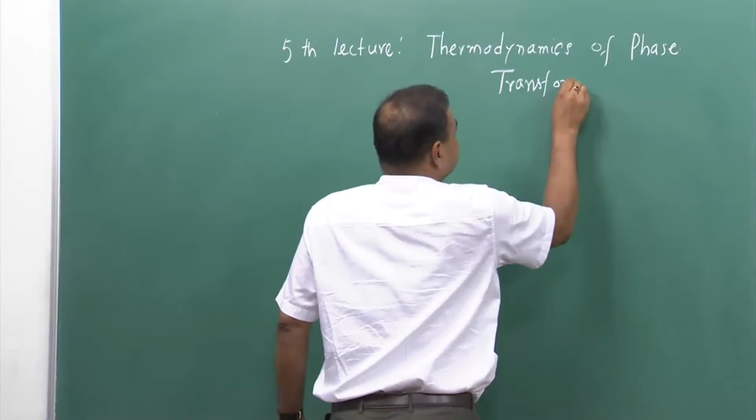It will be on thermodynamics of phase transformations. And mainly our interest would be to quantify a driving force for phase transformation. So, this entire lecture and in next couple of lectures also we would mainly concentrate on how we can calculate the

magnitude of driving force for phase transformations. And in the last lecture we started with finding enthalpy and entropy from the Cp value, because Cp is the measurable quantity which can give some sort of quantification of enthalpy variation as well as entropy variation. And once we know the enthalpy as well as entropy variation, we can easily find out what is going to be my free energy variation, and that free energy variation would allow us to know what could be the driving force for that particular phase transformation.

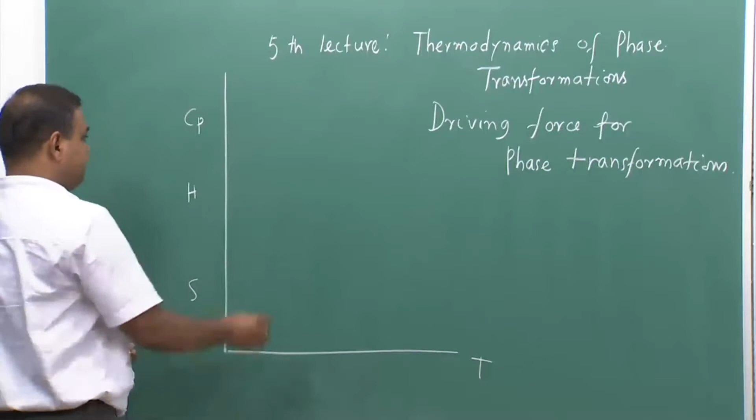Now, last class we started with the pictorial change of enthalpy as well as entropy as well as Cp as a function of temperature for a condensed system, and we have taken a single component system. That means, it is a pure substance. We have taken pure metal actually, and we have tried to see how Cp, enthalpy as well as entropy varies as a function of temperature.

So, we have seen that the Cp varies like this as a function of temperature. This is in Kelvin scale, and then enthalpy varies like this and entropy varies like this again.

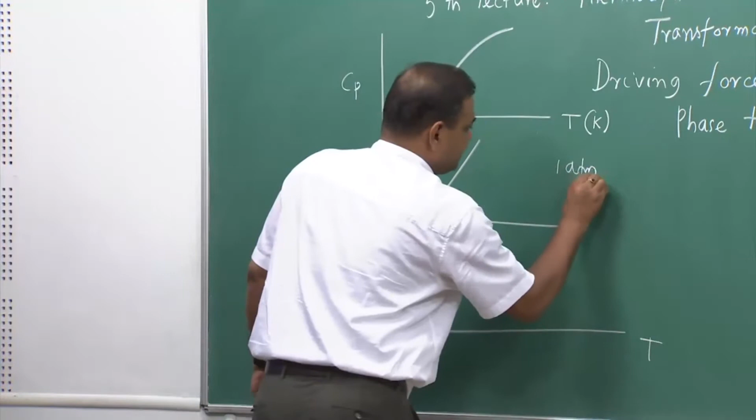Now, also we have seen that if the substance is in most stable condition, and in case of metal we see that the solid is the most stable condition, that time we find out, rather we impose some particular condition. With reference to that condition, we try to measure the change in those parameters. These functions enthalpy, entropy, we try to measure with reference to that particular value. And in case of solid metal, if the atmospheric pressure is 1 atmosphere, that time at 298 Kelvin, the value of enthalpy of that particular pure substance in solid state is 0.

So, now this is also in Kelvin. So, these value is 0, that means this is enthalpy of solid. This superscript S means it is a solid condition.

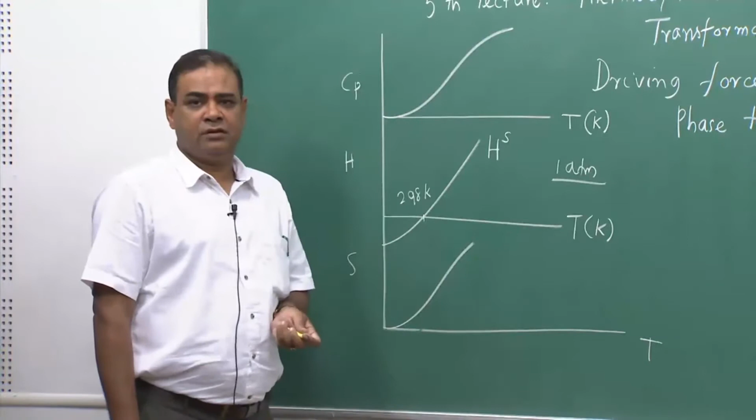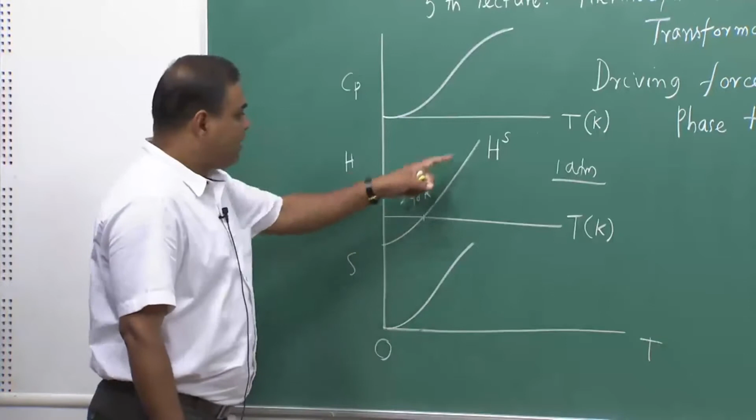Now, this entropy of a pure substance as per the third law of thermodynamics, we know that if it is absolutely pure, if there is no contribution of mixing entropy to that particular total entropy of that substance, then if it is a condensed state, at a constant pressure, this value at 0 Kelvin is 0. Now, once we have this information, so now if this is for solid, this also we can say that this is entropy of solid, and this is also Cp of solid.

Now, for solid phase we have found out these values. Now, accordingly, if we have a condition which is liquid, we can immediately find out what would be the entropy as well as enthalpy values, because in case of liquid also we have the information of Cp for the liquid. So, now in that case the Cp of liquid is higher than the solid Cp. So, if the Cp of liquid is higher than solid Cp, then the enthalpy of that liquid, of that pure substance would also be higher over the entire temperature range.

So, now I can draw the enthalpy of liquid as the yellow line, which tells me the enthalpy of liquid. Now, here interestingly, it is also going through a 0 value, but that 0 value doesn't cross the temperature axis at 298 Kelvin, because the standard state, which is 1 atmosphere pressure and 298 Kelvin, that time this enthalpy of solid is assumed to be 0. So, now then other than that particular temperature, for other phases the 0 would appear at different points, different temperatures. So, it is appearing at this temperature because the enthalpy of liquid is higher than the enthalpy of solid.

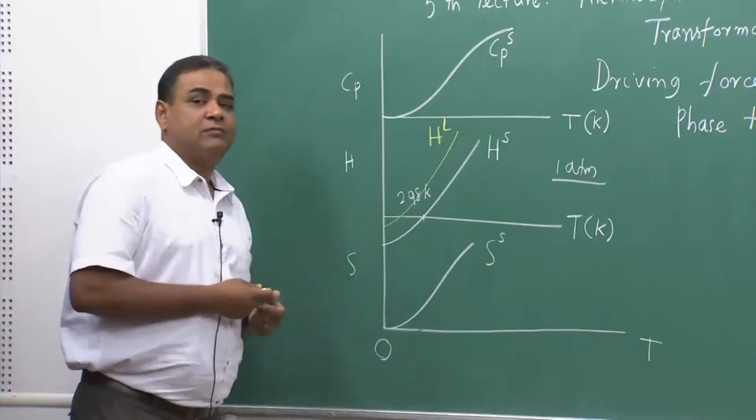Now, entropy of liquid also would be higher than the entropy of solid, because the Cp of liquid is higher than the Cp of solid.

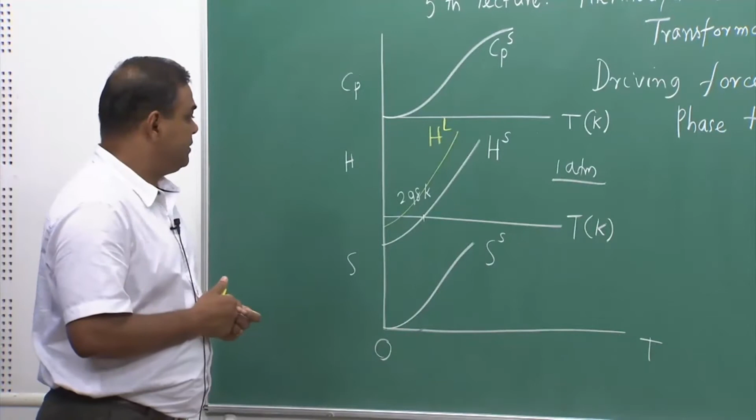Now, our primary interest is to find out G. Now, G can be related to which is enthalpy minus Ts. This is the relation. Now, if I find out the enthalpy of solid as well as liquid separately, and at the same time if I find out what could be the entropy of solid and liquid separately from the Cp data, I can get these two values.

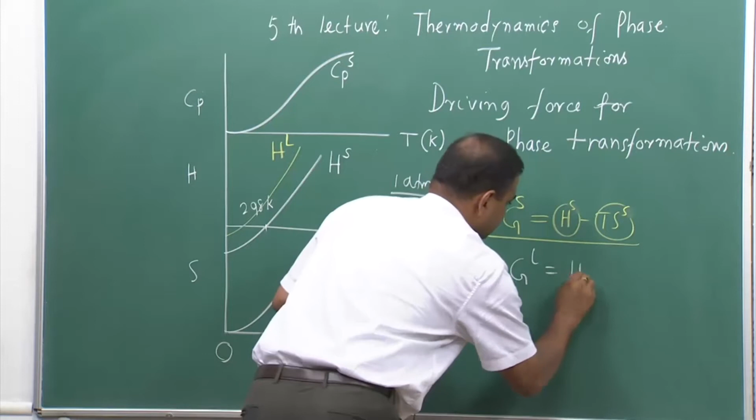For solid I can get solid, and for liquid I can get liquid.

Now, once we have this information, we can also accommodate this TS term along this line with a negative sign. We can accommodate that. Now, at each temperature, I would be able to find out what is my TS term, because temperature I know, and S I have calculated from Cp data.

Now, that TS term, if we subtract from H value, then I will get a point at each temperature. Let us say at this temperature, T1, I try to find out what is my TS solid, which is T1 S solid. So, then that particular thing let us plot it here. So, this is that locus, and this is that point.

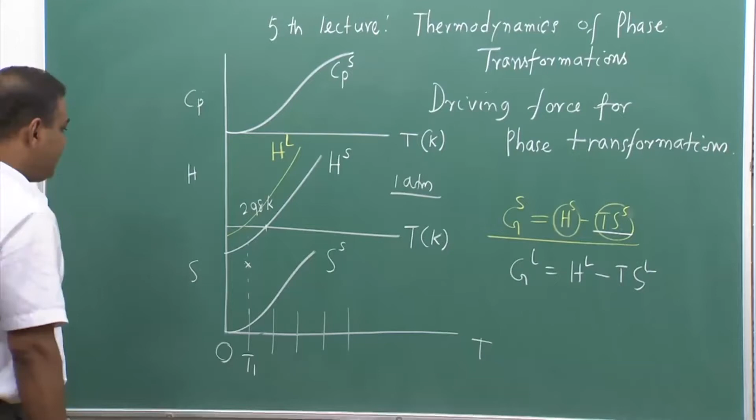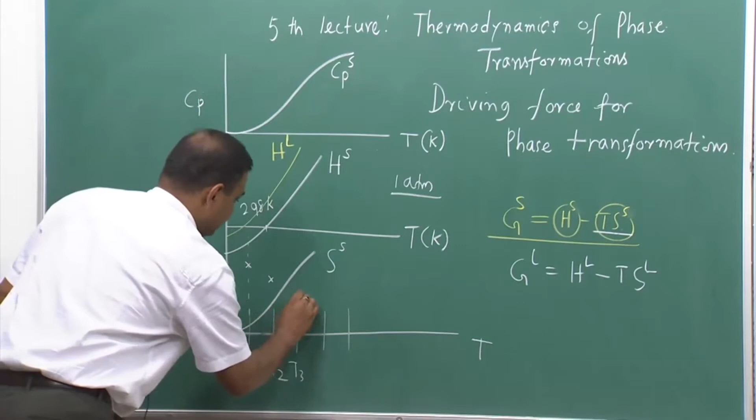Similarly, at a little higher temperature, T2, I can also get another point. Then T3 I can get another point. So, like that I will get information where this particular value is nothing but T1 S1 S, and this particular value is T2 S2 S. So gradually it would go like this.

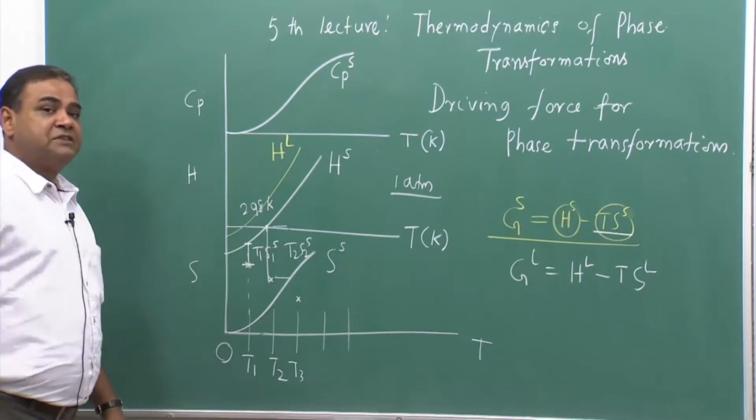Then if I connect those locus points, because those locus points are telling me the G of that particular solid at different temperatures, now if I connect them, this dash line is actually giving me the information of G solid at different temperature.

Now, similarly, I can have those locus points for the G of liquid at different temperatures, since I have the value of HL as well as SL. In that case also I will get another point like this, let me put it in yellow color, because every point on this particular line would be the minus TS liquid term.

So now the question is whether this line will go parallel to the G of solid, or it might cross at some point. So now this is GL.

If I have this particular plot, and try to see what is the slope at each point, that slope is nothing but the entropy of that particular material at that particular point of that particular phase. So if I try to find out the slope here, that is for solid. This is nothing but entropy of solid, and if I take this temperature to be T star, this is at T star.

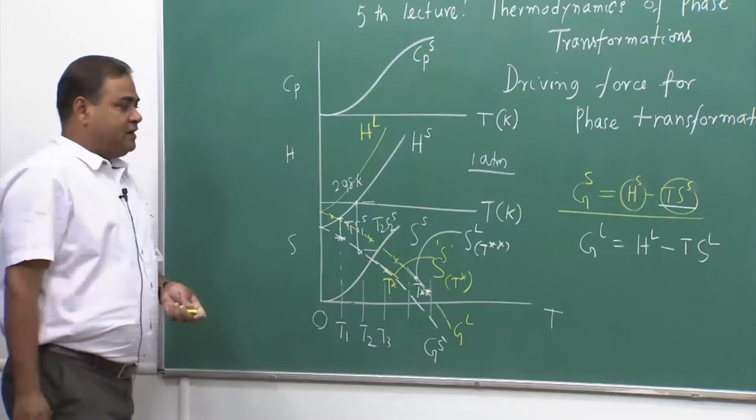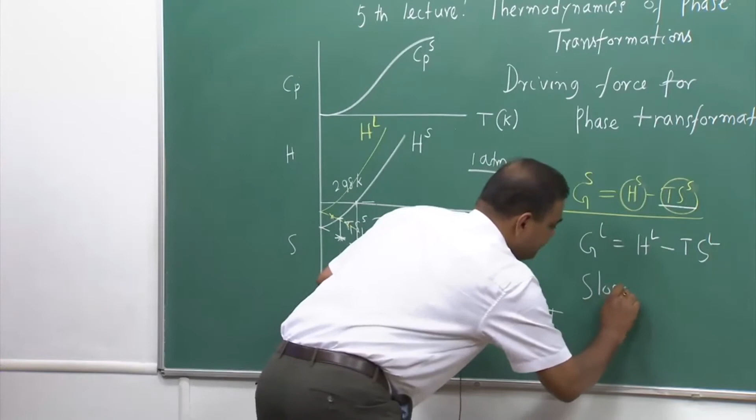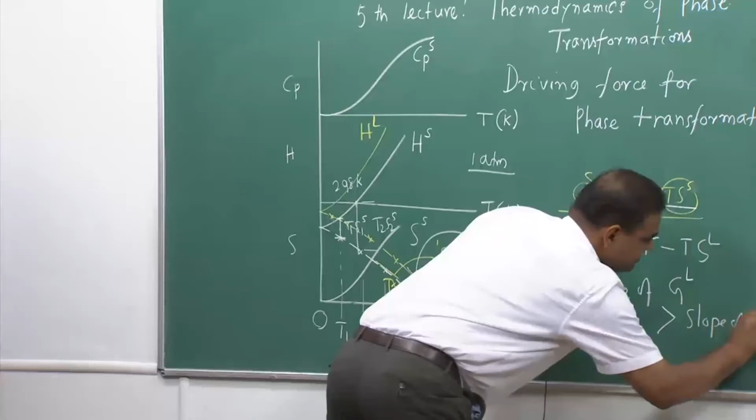Now, we have already seen that entropy of liquid is higher than the entropy of solid. That means the slope change for the liquid free energy line is much higher, it could be high, very high, it could be slightly high, but it will be higher than the slope of the GS line. So, the slope of the GL line is greater than the slope of the GS line. And also there is a negative term, because these points are obtained after putting a negative sign with this, since G is nothing but H minus TS.

So that means if the slope of GL is higher than the slope of GS, that suggests that they cannot go without crossing. So they would cross at some point, because this slope is higher than the slope of this. So that means they will cross at some point.

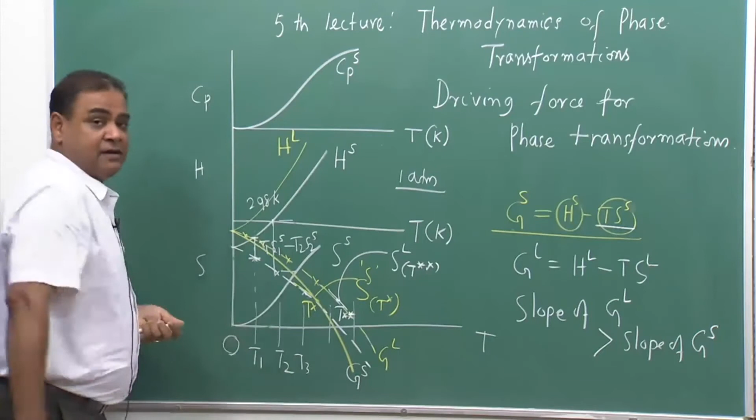Now, interestingly, wherever it crosses, let us see what is the condition there. Now I would like to draw this particular diagram separately, only this part, because I know how these diagrams are coming. So, let me try to draw that.

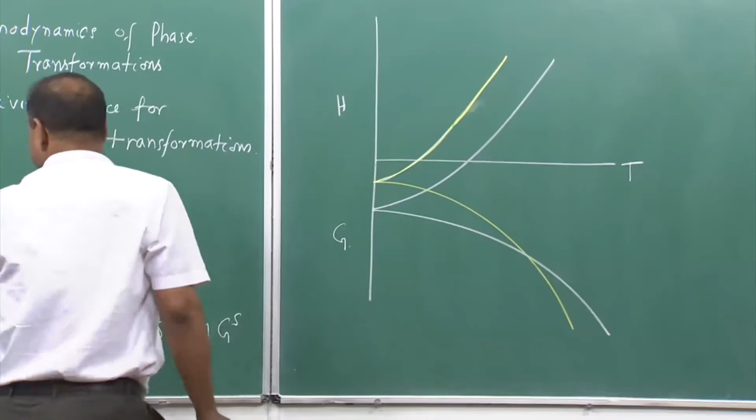Now, as per this diagram, it is very clear, this is my GL, this is my HL, this is HS, this is 298 Kelvin, and pressure is 1 atmosphere. This is in Kelvin scale.

So this becomes my GS, this becomes my GL. And interestingly, one more piece of information: both these lines are actually emitting from T equal to 0 Kelvin.

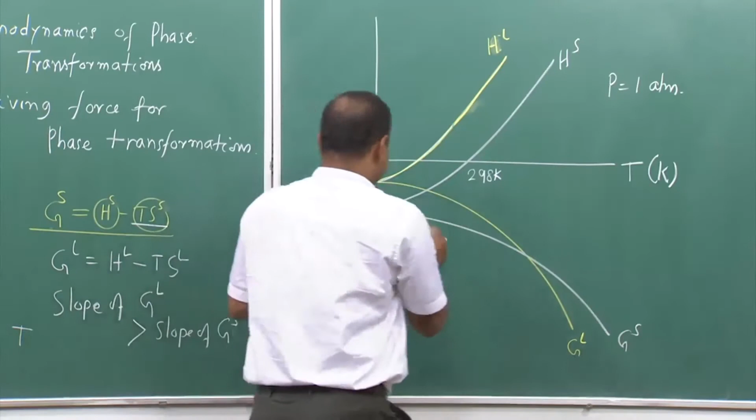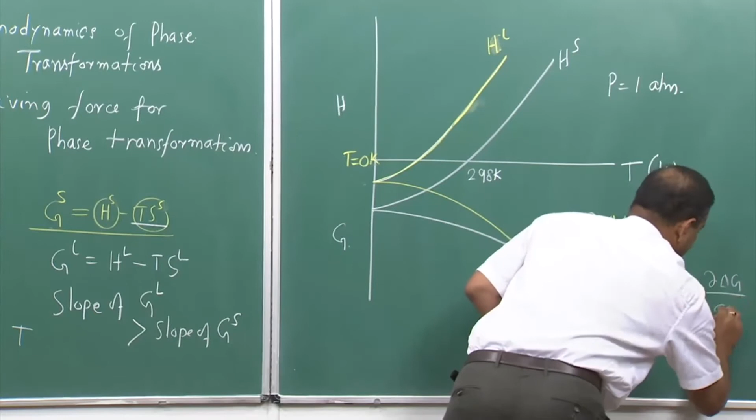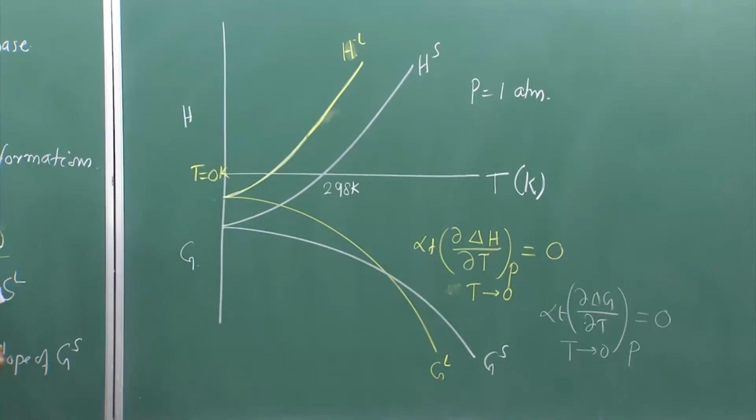If we see the slope variation, if we try to see the slope, you will see that it's... it's 0. Similarly, the limit goes to zero with a constant pressure. Why are they gradually becoming asymptotic and then meeting at T equal to 0 Kelvin? Because this concept arises from the Nernst postulate, which says that for a condensed matter at constant pressure, the change in enthalpy values of a particular condensed phase goes to 0 if T tends to 0 Kelvin.

So this is a kind of statement for the third law of thermodynamics in a nutshell. But we will not go in depth into that particular third law of thermodynamics. We will concentrate on these two graphs. According to these two graphs, it is very clear the slope of the liquid line is higher than the slope of the solid line, and that is why they are crossing.

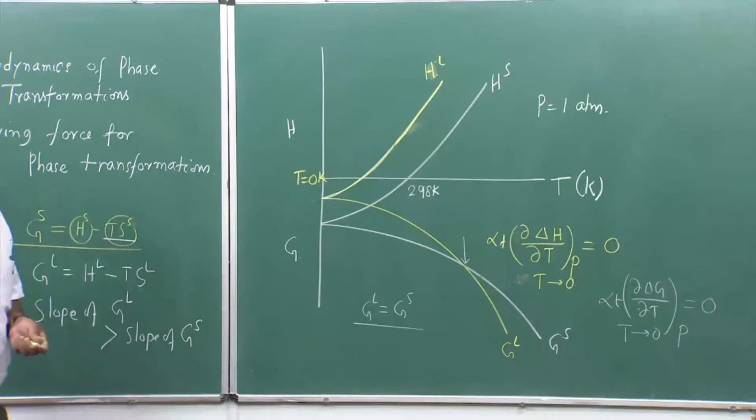Now some interesting phenomena take place at this point, where both the lines are crossing. At this point, GL equal to GS, and if GL equal to GS, it means that del G for liquid to solid, or solid to liquid, that is, if liquid transforms to solid or solid transforms to liquid, at this point both are equal.

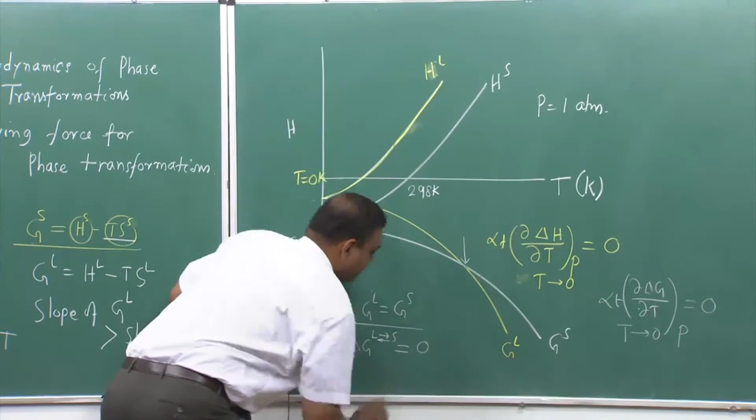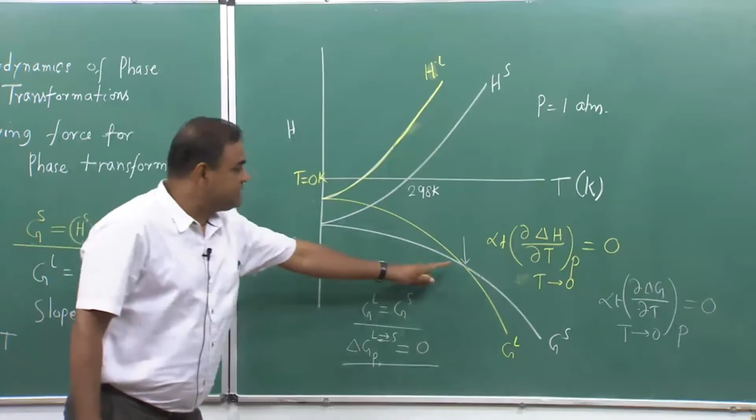Now we have to see what this condition is. And if we consider P to be constant, and this is appearing at some temperature, this difference value is 0, then that particular point we call an equilibrium point.

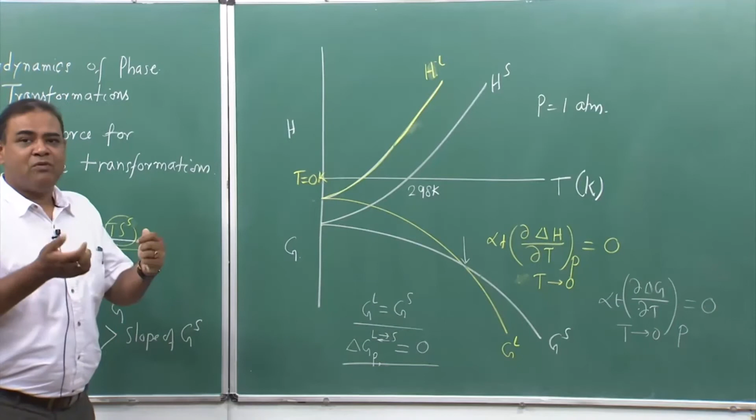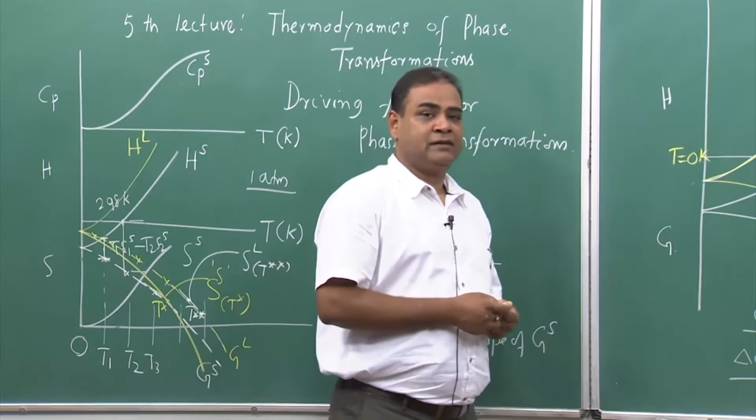And we all know that when metal melts from solid to liquid, or metal freezes from liquid to solid, at the equilibrium point, which is the melting point or freezing point, the free energy change goes to 0, and that is why that is called equilibrium. So that point is nothing but T equal to Tm, and this small m is nothing but the melting point. So this is melting point.

Melting point. And as per thermodynamic perception or concept, whenever del G at constant P and T goes to 0, that means at constant pressure and temperature, if this difference value goes to 0, we say that it has reached equilibrium.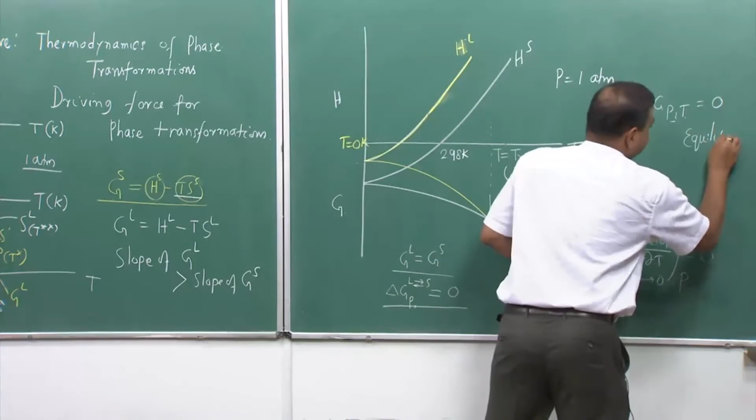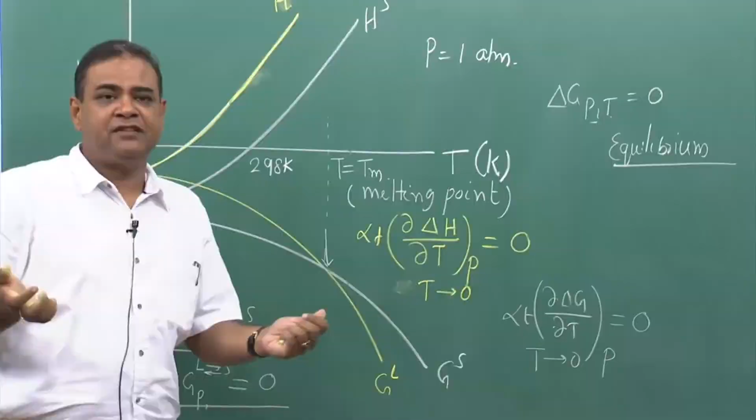This has reached equilibrium, and at equilibrium we do not have any energy available to do work. And if there is nothing available for doing work, no work will be done there and the system will remain fixed there. At the same time, we will not be able to tell whether liquid will transform to solid or solid will transform to liquid. We will not be able to tell.

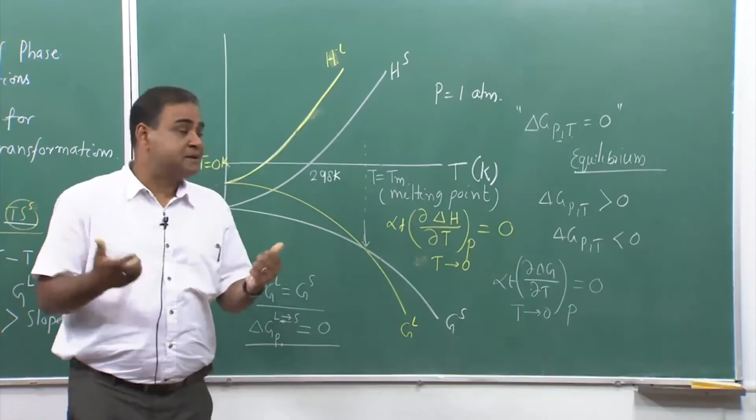Now, any change we can see, at that time these values would take some non-zero value. It can either go greater than 0 or it can go less than 0. Now, if it is less than 0, that means I have some energy which is freely available to do useful work, I can get some work output. So that time we call it a spontaneous process.

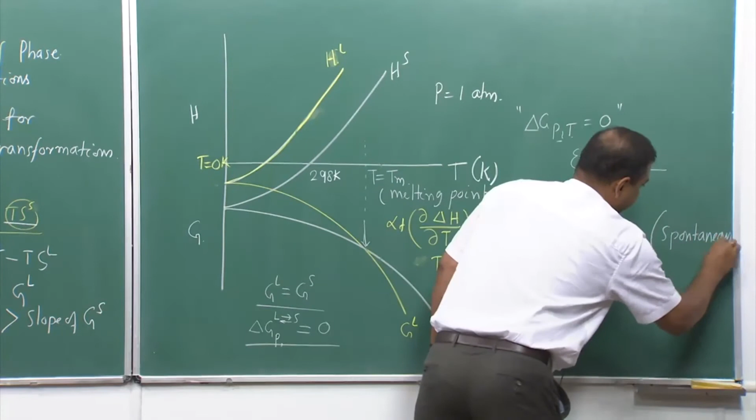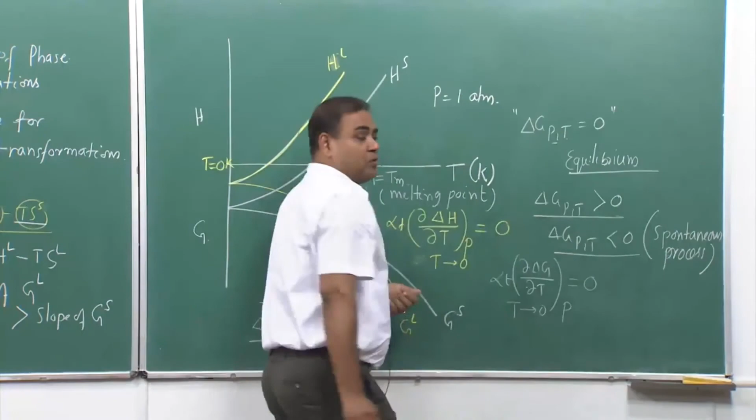Spontaneous process means that transformation is possible. But if this is greater than 0, we would say that process is non-spontaneous, that means it is not possible. Now, when we are saying it is possible or not possible, we are not incorporating any other external stimulants. We will come to that, what are those external stimulants.

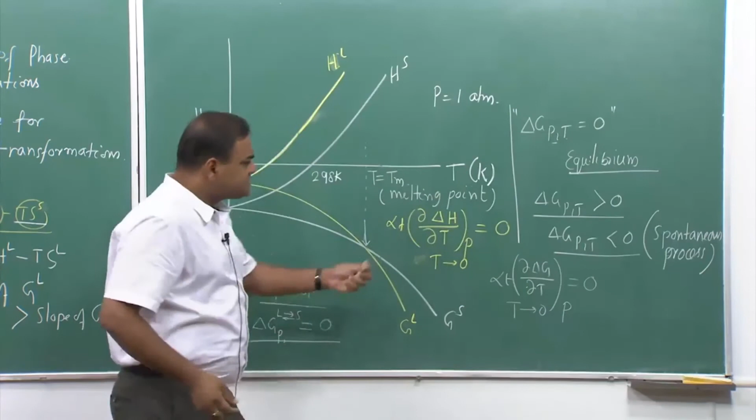Now, in order to understand these three concepts, let us discuss a bit on this concept for a short while, and then we will get back to this particular situation again. Now, in order to discuss that, let us do it here.

Now, if I try to see an energy distribution curve as a function of reaction coordinate, if this is G, we have seen this particular information all the time in our textbooks. Now, this we call it as G1, this we call it as G2.

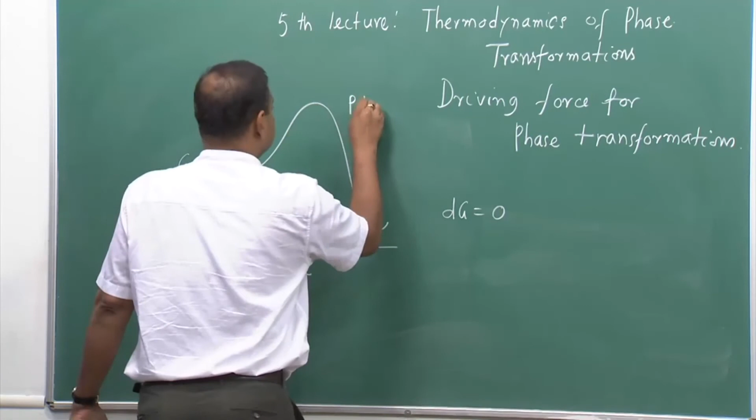Now, as per our concept, if dG equals 0, at a particular temperature and pressure, let us say if this is 0, we call it equilibrium.

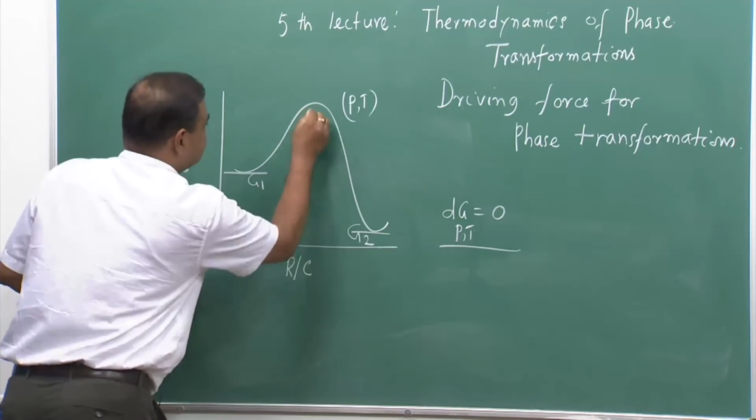Now, I see that there are 3 points where I can have this particular situation, where the slope becomes flat, these 3 points. Does it mean that equilibrium is there everywhere at these 3 points? Yes, as per the theory, as per the concept, we can say that they have reached equilibrium. But that equilibrium can have a different nature.

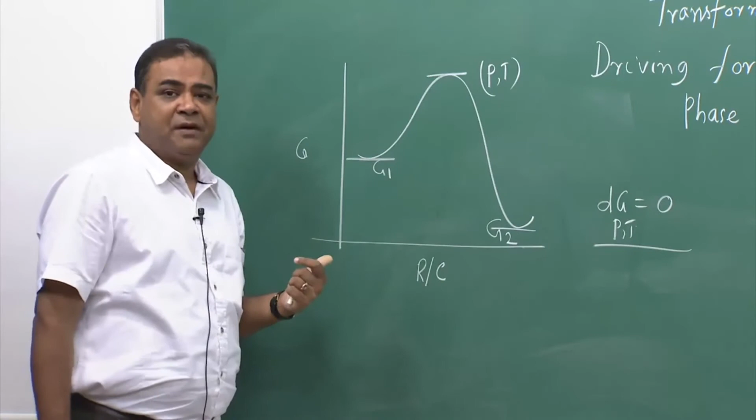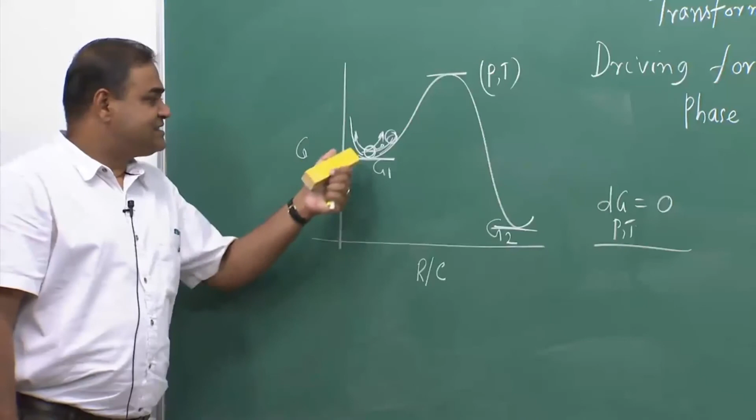For example, at these 2 cases, if I try to see a ball, and if I give a little movement, a little displacement to this ball, it will try to roll over if it comes here, and then again we release it. And that releasing, it will go like this, it will again go like this, and gradually that amplitude would reduce, and finally it comes back to this. So, that means we can say that the system tries to maintain that particular position if we do not have much disturbance to the system. So, that case we can call it stable, and here the same situation persists. So, we can call it stable.

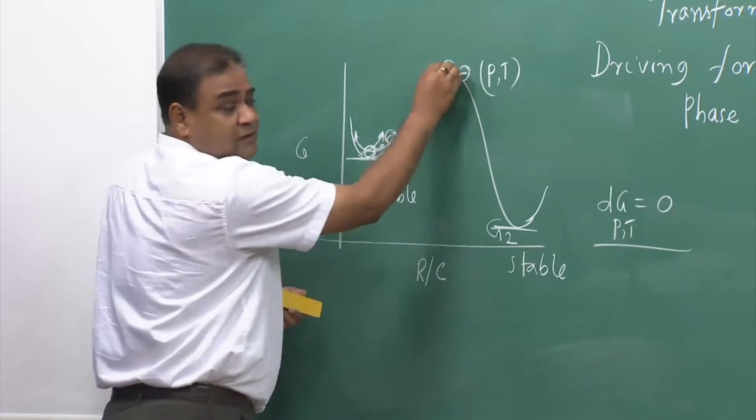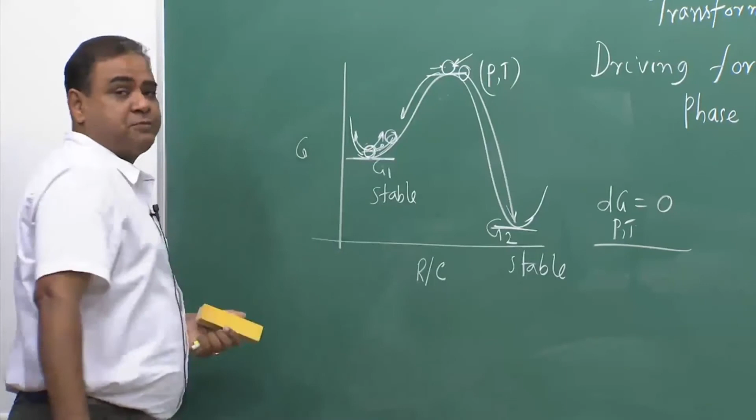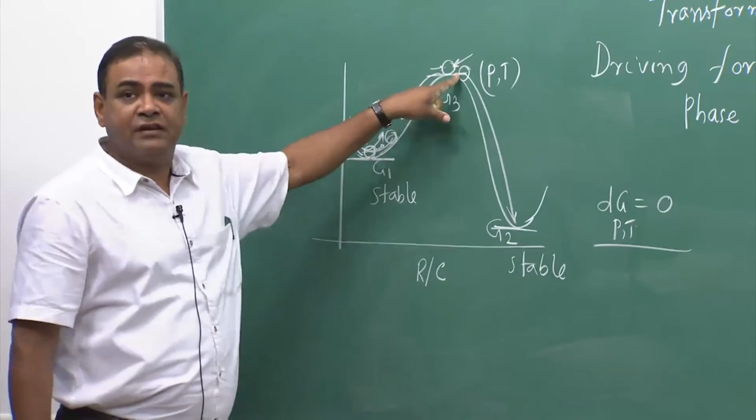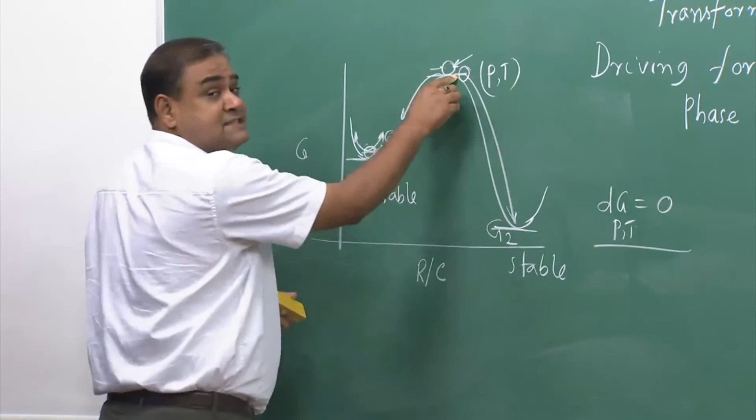Now, at this point, if I have a ball and give a very little displacement to it, immediately it will come to the down slope. Then it cannot go back to this position on its own, rather it will try to fall down here. So, even if I give another small disturbance, it will try to move and fall down and come to this. And if I consider this to be G3, at this point this condition is there, and we can say this is equilibrium, but even with a slight disturbance, it does not try to maintain that position, rather it dislodges from its position and goes to the next stable position. So, that is not a stable equilibrium, we call it unstable equilibrium.

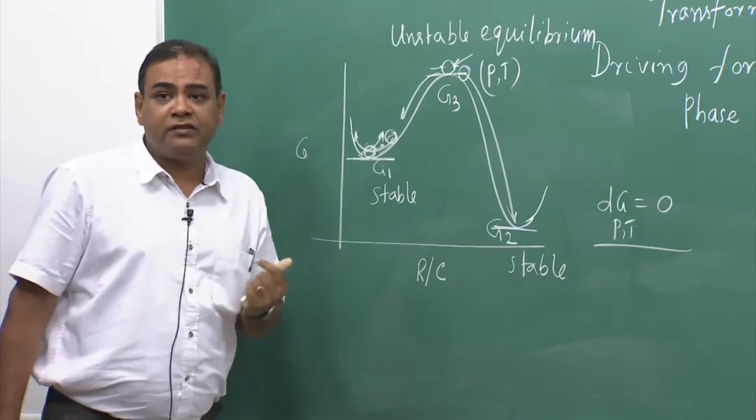Unstable equilibrium: if I do not do anything, it will try to maintain that position, but it maintains its instability. Whenever there is a little disturbance, it will start dislodging. And at these two other positions, they will not try to go out of the system, rather if it is a small disturbance, they will start going back to this position and stay there. So, that is why these are called stable positions.

But now, are they the same stability? Are they having the same stability? We will discuss that, but let us come to this point.

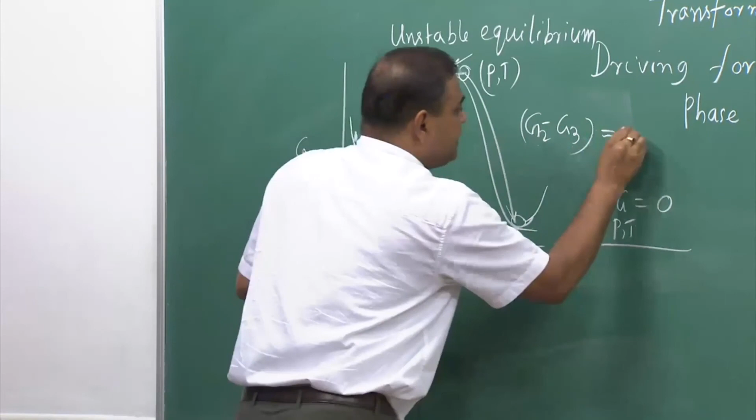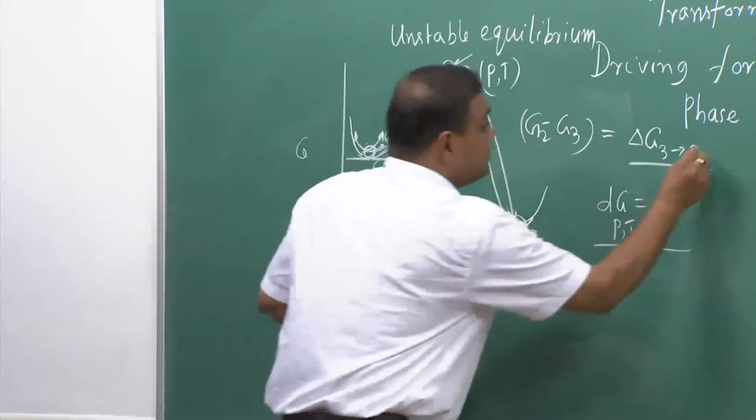Once we have a little dislodge from this particular point, we see that G3 to G2, it can immediately go. So, if I try to see what is the difference, G2 minus G3, that means final minus initial, would be delta G, we can say 3 to 2, this has a negative value, because this has a lower value than that. So it goes negative, and whenever this is negative, I see that the system goes spontaneously from this point to this point.

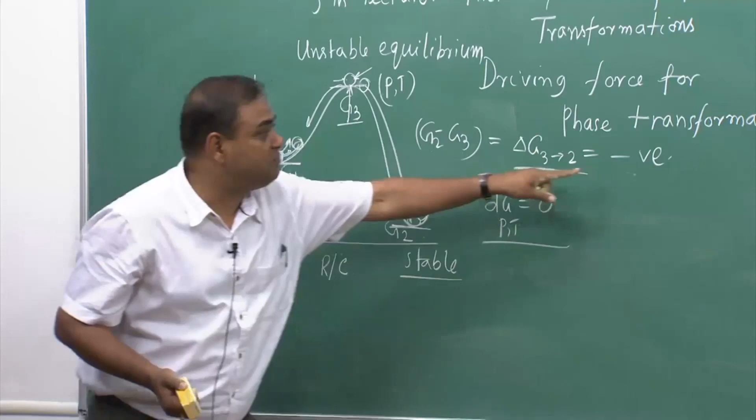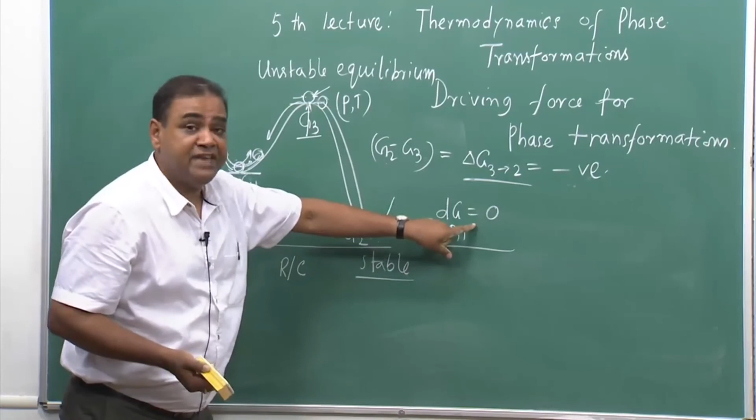So, that means the spontaneity is decided by the negative value of the difference of free energy. Similarly, if I go from here to there, there is also a spontaneity, G1 minus G3, it becomes a negative value. So, that means if this free energy change is negative, it is a spontaneous value and spontaneous process, that means that process can take place.

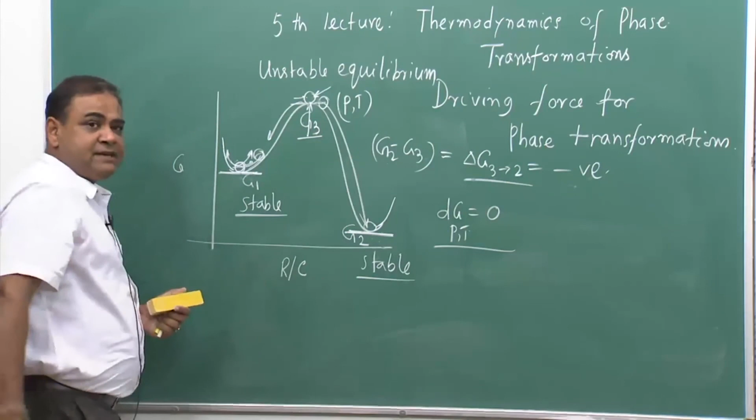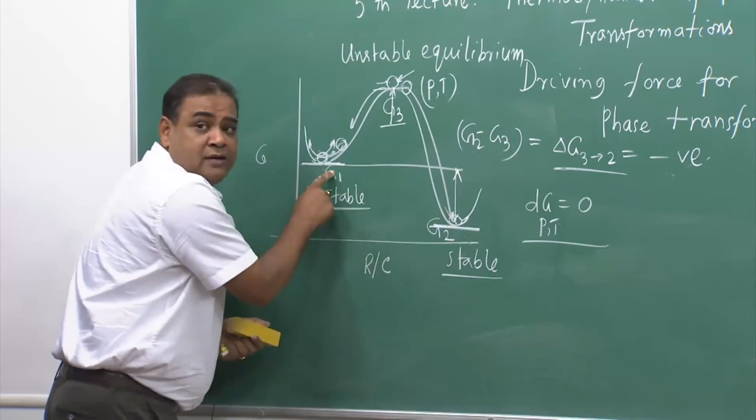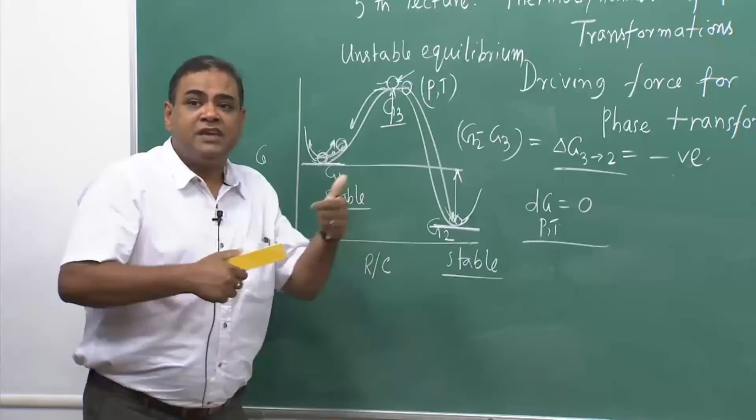Now, we will try to discuss these two stabilities as well as what happens if we try to see this difference. Here also, if we try to see G2 minus G1, we see that is also a negative value. That means that process should have been spontaneous, but the spontaneity that exists here and the spontaneity that exists here, these two spontaneities are different. So, we will try to discuss these informations in our next lecture. Thank you very much.